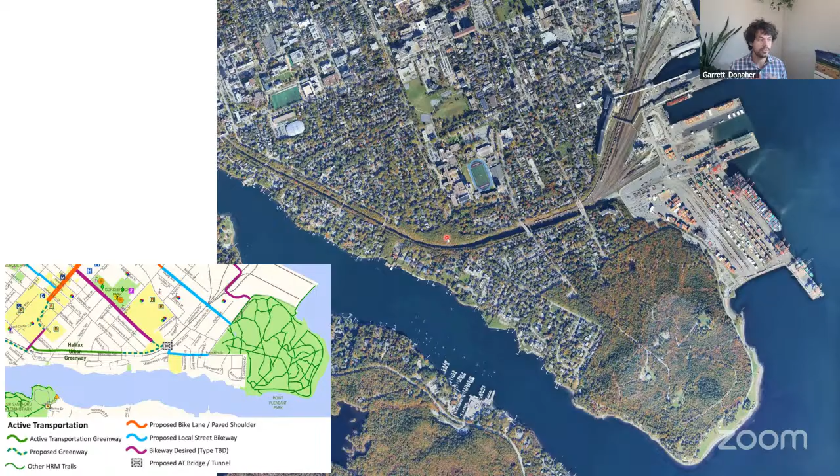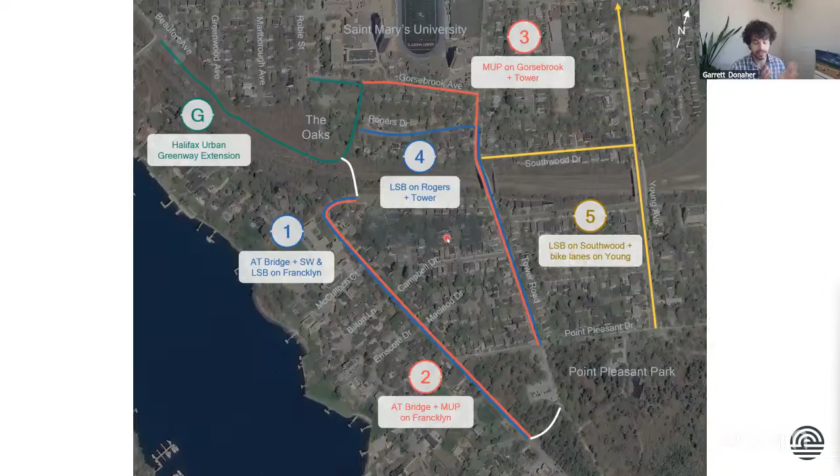I have a map here showing 5 different options. Two of them cross from the Oaks across a new active transportation bridge to get to Pine Hill on the other side of the CN rail track. Two of the options use the Tower Road connection, where there's an existing bridge. The fifth option uses Young Ave, the existing bridge there. We'll go through each of those, the Greenway connection first, then the 5 options coming up in the presentation.

So where are we at? Right now we've gone through the existing conditions, analyzed all the technical data, walked around the neighborhood, and tried to figure everything out. We came up with these 5 options that we're going to be evaluating. Those concepts are what we're talking about today. We talked about them with some stakeholder groups, with SMU, and with the Accessibility Advisory Committee earlier this week.

At the beginning of October we're going to do a few public engagement activities - a couple of pop-ups, a public meeting, and an Engage Halifax website with a survey. We're trying to reach everybody at this concept stage to help us evaluate the options, provide feedback on what's working and what's not, but also give feedback on the evaluation framework itself to make sure it lines up with the goals of the project and the needs of the community.

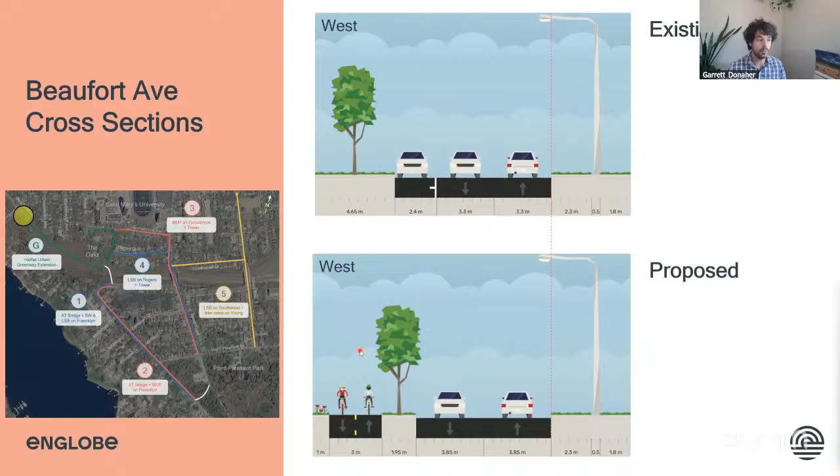To improve Beaufort, here's a quick cross section. Today, Beaufort is basically just some parking and a couple of traffic lanes. In the proposed future, we would push the curb out a little bit, take away the parking on that tiny cul-de-sac, and provide a multi-use path extension of the Greenway that exists today, through the cul-de-sac and into the woods.

There's a couple of different connections we would make along the way. Greenwood Avenue is one of them, the next street over from Beaufort, so we'll be connecting into the sidewalk at the end of Greenwood Avenue. The next street over is Marlborough, but it's too difficult to get up to - it's really high compared to the elevation of the ground in the woods, so we won't be able to connect to that one.

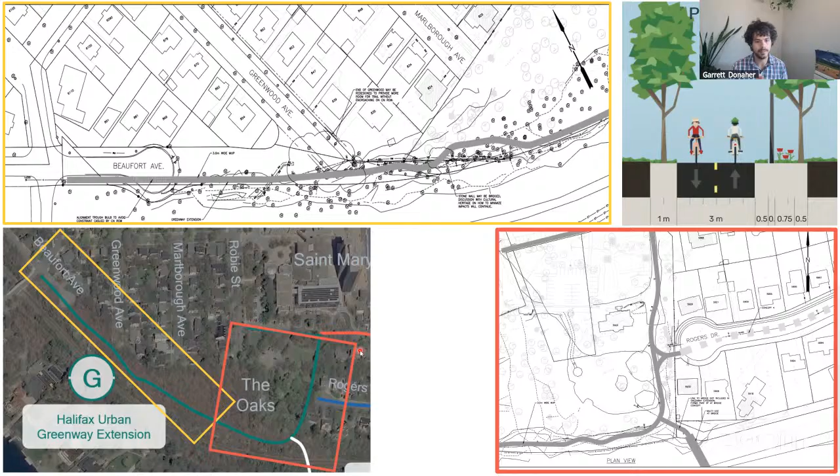As we come along the edge of the CN rail cut, we'll make a hard turn when we reach Rogers Drive, connect to the sidewalk there, and then head up to Gorsebrook. Gorsebrook is kind of the end of this segment of the trail.

Here's what that looks like in cross section. Existing Gorsebrook varies a lot - it's privately owned by SMU in this area, so they've got a lot of different parking situations happening. This is just a sample where they have a little bit of parallel parking next to their access road. In this section, we would probably have to eliminate that parallel parking in order to fit in the multi-use path.

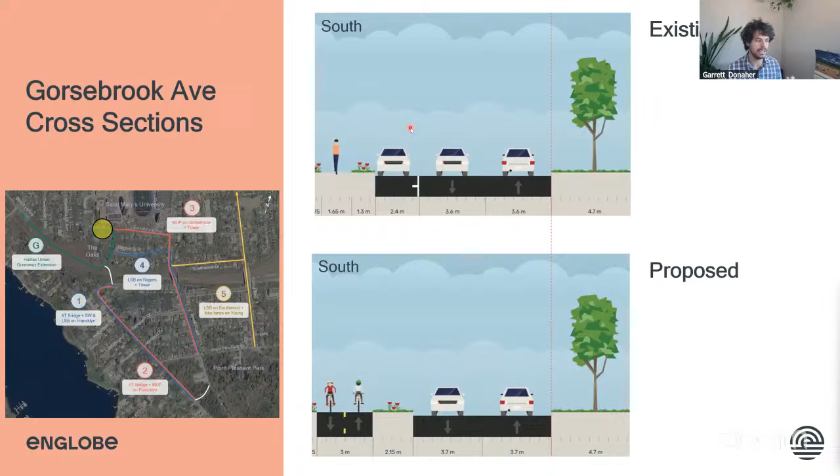Next, I'm going to talk about concepts 1 and 2 a little bit together. Both of these concepts use that active transportation bridge that goes from the woods, from the Oaks, crosses the CN rail cut with the new bridge, and then lands on Pine Hill.

So that's concept number 1, shown here in cross section. I have these red dashed lines to show how the existing curbs line up with the proposed curbs, so we're not really moving around a bunch of infrastructure, just redesignating how that street is used and adding in the sidewalk.

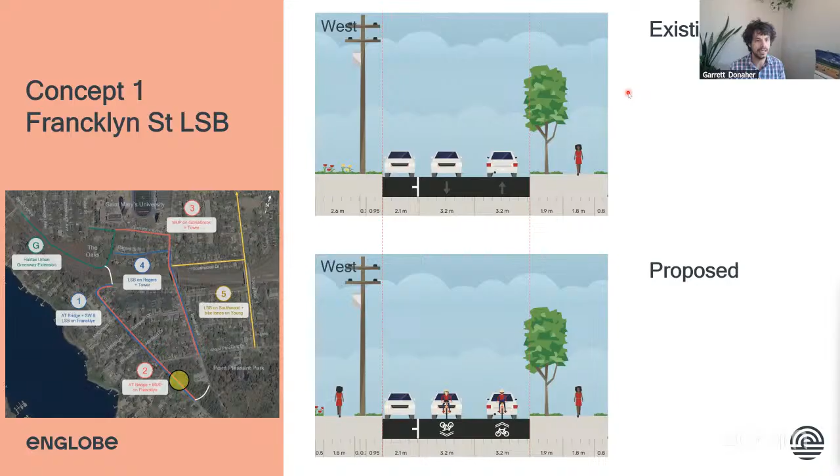Cross-section wise, concept number 1 is a local street bikeway, so we're not really changing the infrastructure of the street, just redesignating it and adding that sidewalk. The multi-use path option converts that asphalt sidewalk into a multi-use path.

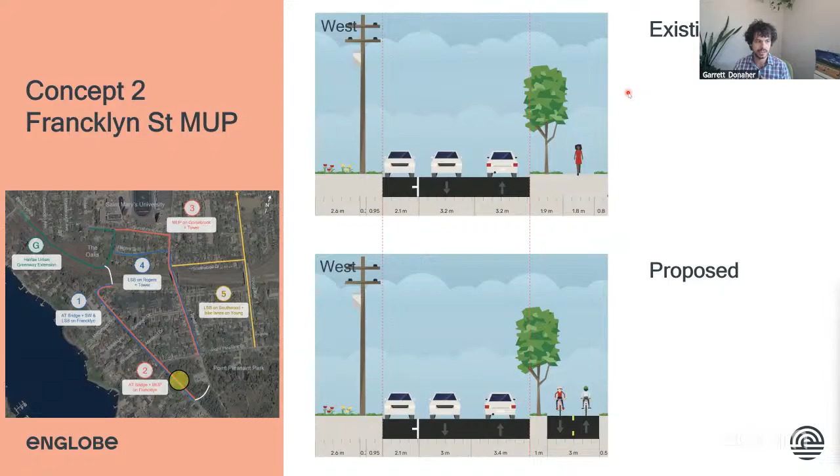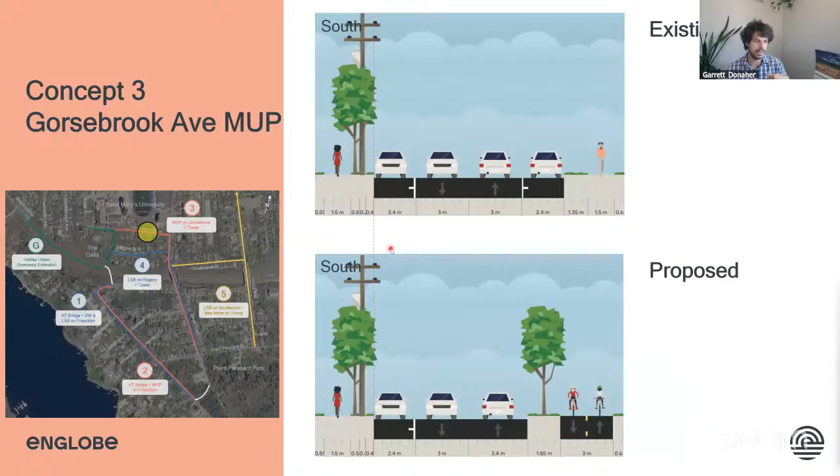There's some parked cars and a sidewalk along the left-hand side of this image fronting on the SMU campus. That's the space where a multi-use path would fit, so we'd remove one side worth of parking and upgrade that sidewalk to a multi-use path. I'll skip past the cross section quickly there.

So there is quite an experience of collisions, striking parked cars. We get complaints from the transit operators that they have to jostle with cars approaching them as they pass through this area. It's a little bit tight.

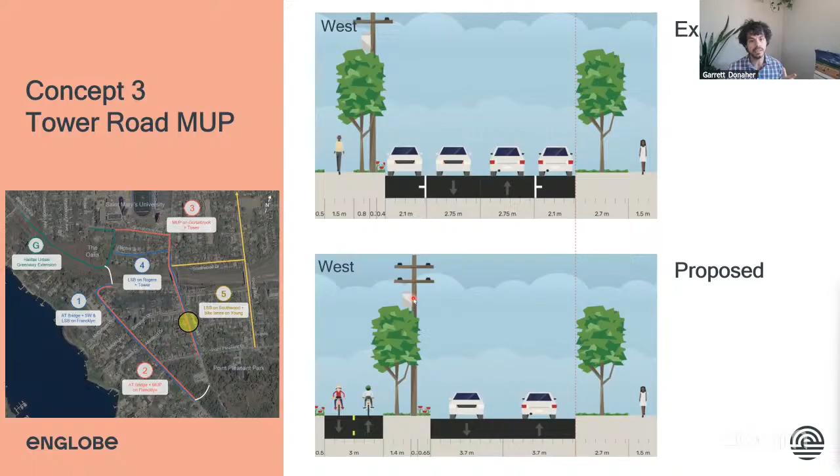As part of the Concept 3 proposal with the multi-use path, we'd be bringing that multi-use path down the west side of Tower and eliminating parking on both sides, reallocating some of that street space so it's better for transit and there isn't that kind of conflict between oncoming vehicles. This option has an enormous amount of impact on the street trees and the utilities, so it's not an easy option to implement. That's CAD.

I'll skip over. The next one, concept number 4, is Rogers Drive and Tower. Most of Tower is the same area that concept 3 uses, but it's a local street bikeway instead, and then it starts on Rogers.

What we see here is Rogers does a really weird dog leg when it connects into Tower. There is a sidewalk that cuts off that dog leg and comes straight out from Rogers to Tower. As part of this concept, to make sure those users are accommodated as best we can, we would upgrade that sidewalk piece to a little multi-use path so we're not sending people up the weird dog leg and back down again. We know people won't do that if that's the infrastructure we provide, so we'll want to do that upgrade for the cut-through piece.

On Rogers, it's pretty straightforward. As we've seen before with some of the local street bikeway stuff, we're not changing the infrastructure at all, we're just redesignating how it's used.

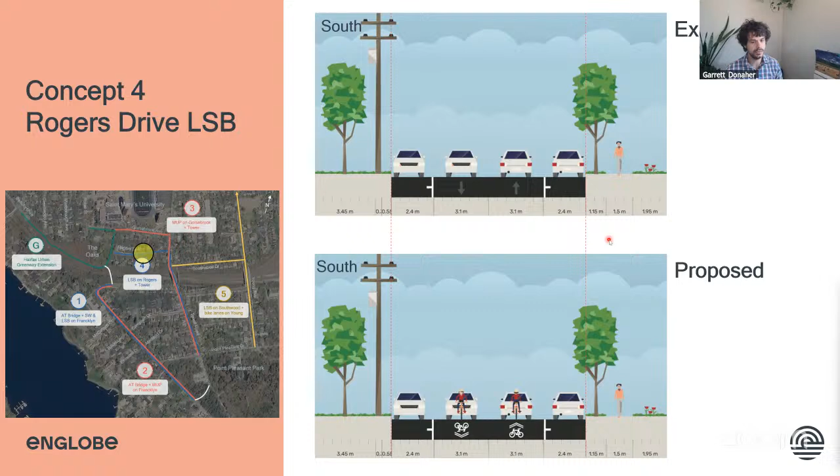I'll skip the CAD. On Tower Road, we are changing how the road is used a bit more significantly here. We're taking parking away from one side, and we're doing that in order to resolve that oncoming vehicle conflict we have today with the narrow cross section. So it provides a bit more space for cars, buses, and bikes to all share the space.

Tower Road is right at the upper end of what's acceptable in terms of industry guidance around local street bikeways. So we have to be careful with how we implement it on Tower, provide a bit of additional traffic calming, and be careful with how we designate things.

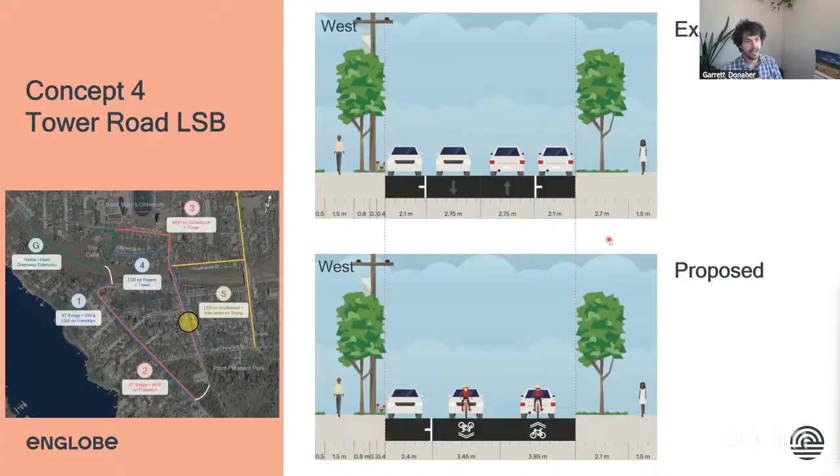We've held a hard limit on Young Ave at the outside curbs because there are an enormous number of mature trees in the boulevard, so we want to stay out of those trees.

The second option keeps the median. That median feature is really distinctive for Young Avenue and has a cultural value to it, so we wanted to show an option that preserves it as well. There are only a few trees and they're a bit smaller, so it's not so much the environmental aspect here as the feeling and identity it provides that we're trying to protect with this option.

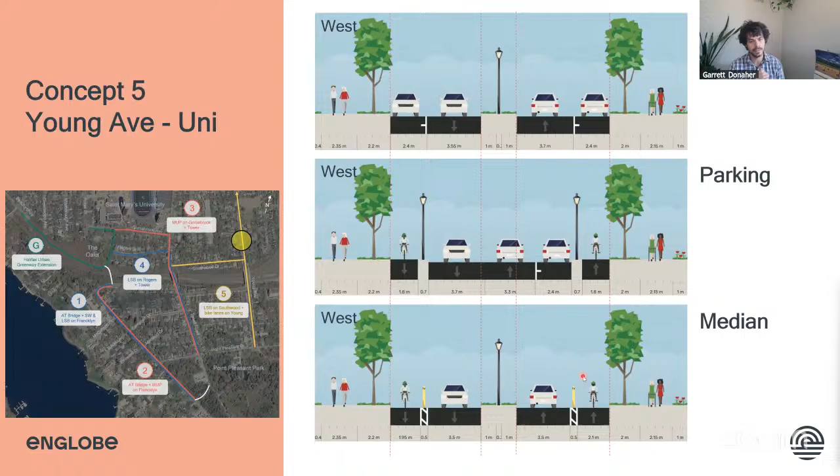But in order to save the trees on the outside and save the median on the inside, we need to use the parking space on both sides of the road to provide a bike lane connection. This connection serves our project, but we're thinking about it more broadly too, and the potential of connecting all the way up to South Park, where there are existing bike lanes like the bottom option. The next one is just CAD, so I'll skip that and kick it back to you guys to pepper me with questions.